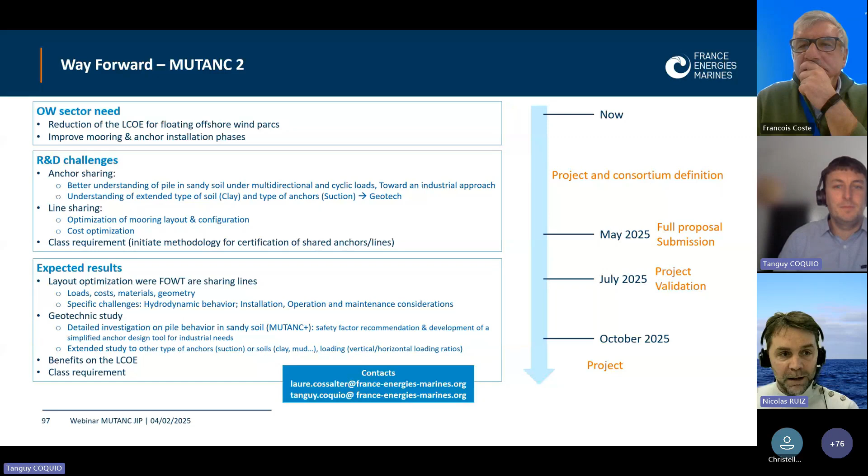So the first one, perhaps for Tanguy, concerning the numerical modelization when you modelize the nylon rope. A question regarding the axial stiffness that you consider for this polyamide. Yes, so we consider for the nylon nonlinear stiffness for the mooring lines.

It was a simplified model extracted from the project Polyamour carried out by France Energies Marines. For the polyester law, it was the SIROP models, but just for the nylon, it was just a simplified nonlinear stiffness law. And I can see that there is a comment for this question, if we consider creep and the seabed clearance.

So no, we did not consider creep. That is, of course, an important subject when you look at synthetic ropes. And we did not consider the seabed clearance either. So the idea for all the mooring design is not to define a design at the level of detail that can be installed, but to have a robust enough design to be compared between shared and unshared.

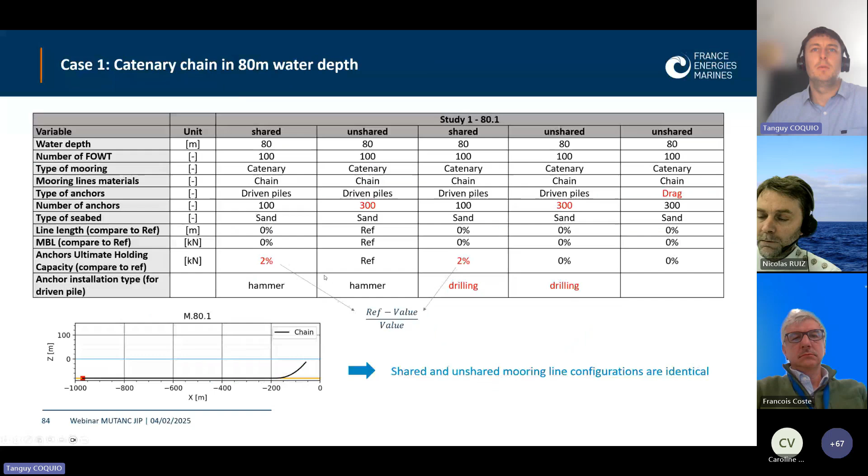Tanguy, perhaps just to clarify the conditions you use for accidental load case analysis - is it 1 year, 50 years return period, or other? It depends on the type of ALS studied. I can come back quickly on the slide if you want. Yes, please, to answer that.

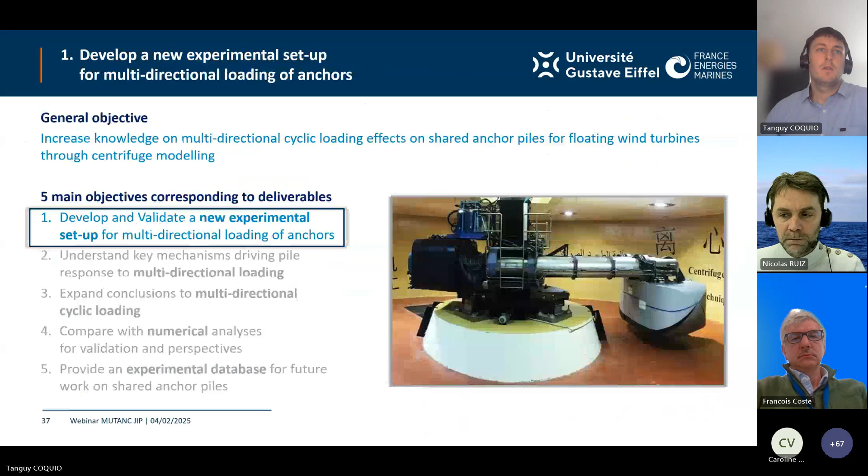Just a second. So it will be here. Yeah, so we based it on the DNV recommendation, and there are several cases in ALS, extreme cases where we applied a combination of 500 return period wave with 50 year return period wind, and the opposite, 50 year wind and 500 years waves. So this is one ALS case, and for transient condition and failure condition, it's 50 years return period conditions for wind, waves, and currents.

But the coefficients applied for the check are easier to pass, as you can see here. The coefficients beyond the tension are easier to pass. This is where it becomes easier. Okay, hope it answered the question - so 50 years, more or 500 years.

Okay, thanks, Tanguy. In the same way, could you just clarify the way that you use to optimize the mooring footprint?

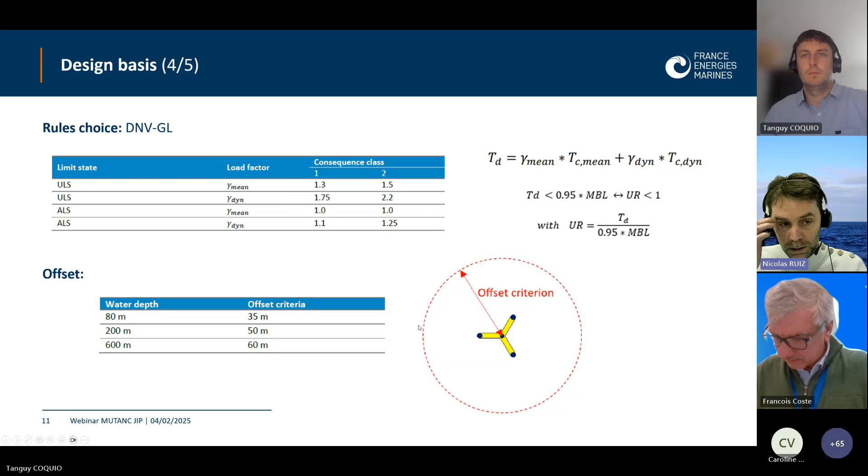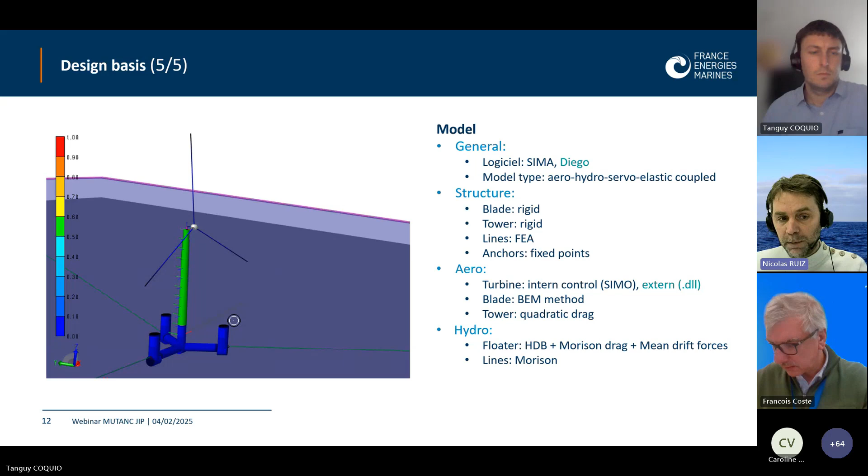So for the mooring footprint, I did not... without anchor sharing, in fact, and if drag embedded anchors are used, no anchor uplift can be expected. So for the pile, you consider also perhaps the capability to have an uplift, a little angle?

Yeah, so this was not considered in the optimization. In the optimization on the mooring lines specifically, we just consider a fixed point on the bottom. So I agree, to do a precise optimized design you have to include the type of anchor you're using - pile anchor, suction anchor, drag anchor. But in our case, it was not the case. It was just a fixed point at the seabed surface, so not considered.

The cost optimization is just on the material of the mooring lines, including the connectors and the tensioner, plus the criteria mentioned before - the offset, the tension on the lines, and that's it. And the parameters are the MBL, the line length, and the type of material we can choose for the optimization, but no consideration about the type of anchor specifically.

Thanks, perhaps a general question. So for the shared anchor layout in relatively shallow water, have you considered the potential extra cost of cable routing to avoid mooring clashing? And no, so I think you consider a dynamic cable - no, we did not include the dynamic cable into the layout optimization or the mooring optimization.

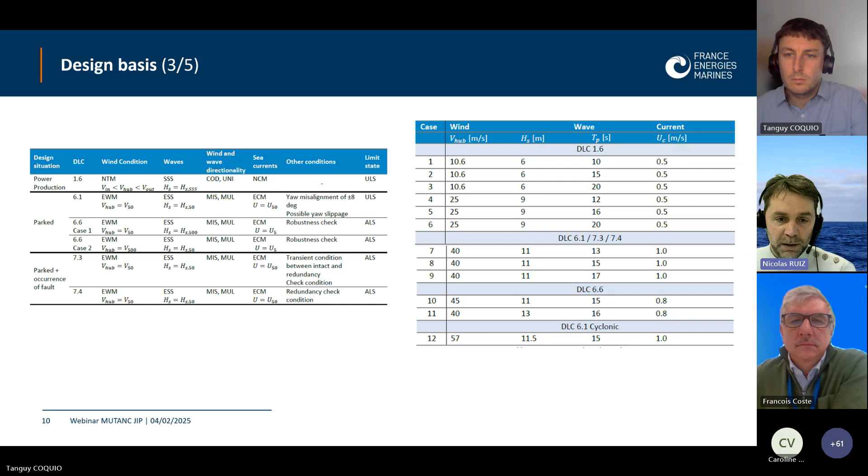Thank you very much, Nicolas, and everybody. Thank you. I see just a last question, Nicolas.

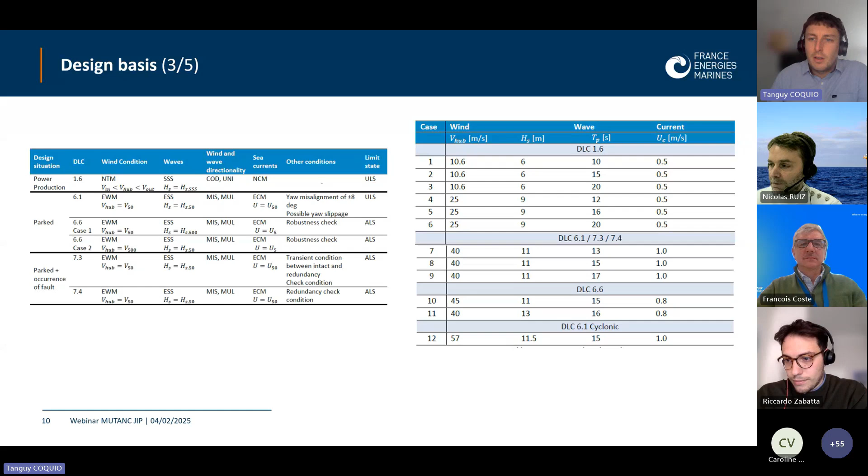Yeah, I think it's an interesting one, about the margin left in the ULS utilization factor ratio. So there is no margin left for the ULS utilization factor, it's up to the limit, so it's possible that if we include fatigue analysis, we would have to consider that. And for the transmission of the fatigue to the pile, it's not considered because we think, and it's a recommendation from a geotechnical point of view, that the anchor design is governed by extreme events and not by fatigue analysis. So we did not implement a methodology for site combination for fatigue analysis at the pile.

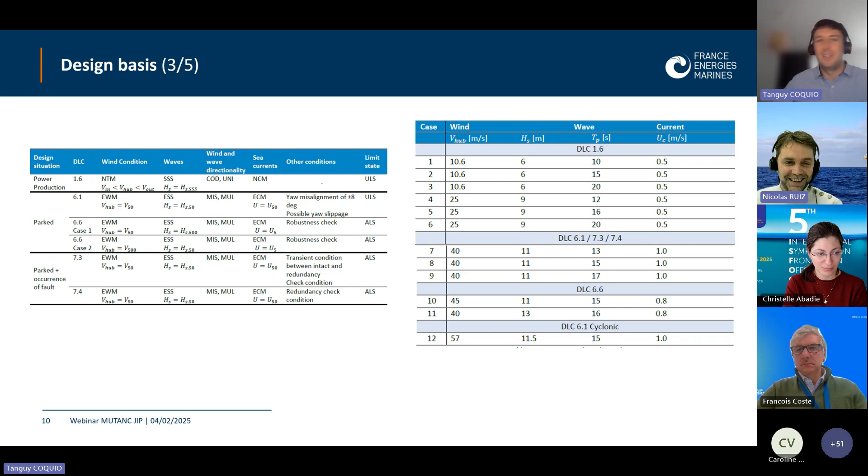That would be it. Thank you, Tanguy, for this additional comment. No, thank you for that. Thank you to all.